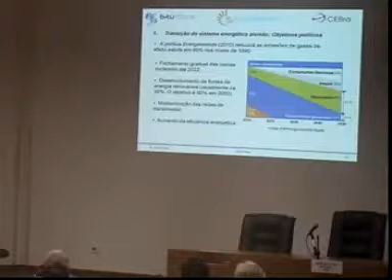In Germany, we have 30% of renewables as we are speaking right now, but we have 13% of nuclear power, and in total 40% of coal. That means that for years we have depended on fossil fuels and nuclear power for a cheap, reliable and secure system. Now, in order to become so dependent on renewables, we're going to have very big challenges with these intermittent sources. Nevertheless, the German government understands the importance of a sustainable growth of renewables with energy security, and that's why energy storage became a priority for the federal government of Germany.

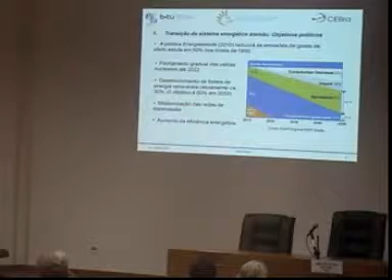Important is that in the Energiewende, the energy transition, by 2022 all the nuclear plants are going to be shut down. So this topic also becomes more relevant because there is a time approaching very close to us. And there are of course other parallel activities planned, for example to expand the network and to make more flexible and efficient the conventional power plants. So in Germany, we have a lot of challenges coming very, very fast.

This is an example of the energy mix before and after the energy transition. Here in this graph on the right, you see what I explained, that we are very dependent on fossil fuels, and how it's going to be in the future. Now, there is a law in Germany, and the renewables have priority. No matter what, the production of wind and solar has to be integrated in the grid, because there is no possibility to turn off the nuclear or the lignite power plants.

Then there is the need to reduce their load, if possible, or to generate an extra amount that goes to the network from Europe, the ENTSO, European Network of Transmission System Operators. It happened already in Germany last year that 100% of the energy consumed was supplied by renewables. But of course, it was a very specific case, a weekend with low demand, a lot of sun, and a lot of wind.

How did this happen? It's because in Germany there is already an overcapacity of solar and wind. This is already a reality. Therefore, there is a difference between Germany and Brazil.

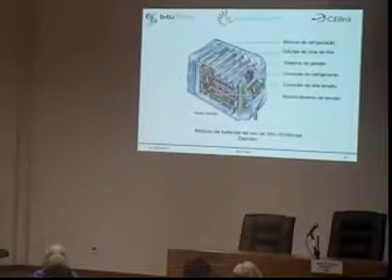In Germany, we do not manufacture the whole batteries. It is a trend in the whole world, but right now it doesn't make economic sense to produce the cells in Europe or in the United States because the prices are so cheap in Asia. So LG, Samsung, all these batteries from Korea, from China, they dominate the market. And in this case, we have an anecdote with a person that is also present here from Bolivia.

We got in contact a couple of years ago because Daimler in Germany was planning to sell two production lines for battery pouches, battery cells, the whole automated line, because they realized it's not economically feasible. They decided to import from Asia, even though they had already built the whole production lines. We met someone from Bolivia, from Comibol. We tried to establish a link to see if they wanted to buy the technology.

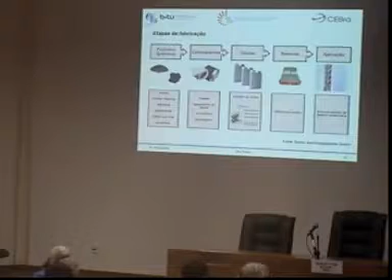Somehow it didn't work because of the time frames and bureaucracy, and because the software of the facilities was in German, many things. In the end, all these plants were sold as electronic waste, so that you have an idea that Daimler preferred to let everything be lost than to keep producing in Germany. So it is interesting to know that Germany also has the same trend as other countries. The pouches are imported, and then the arrangement is assembled in Germany.

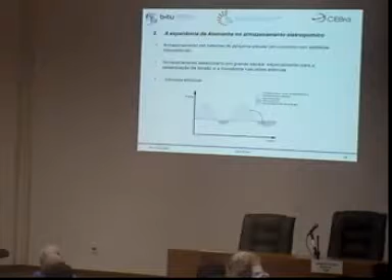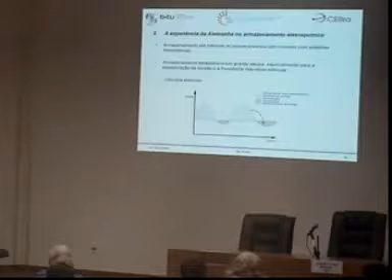And now to go really deep into the energy in Germany, I'm going to divide the presentation into three parts. The first one is storage at small scale. The second is stationary applications. And the third one is electric autos.

So in Germany, since 2000, there is a law called Erneuerbare-Energien-Gesetz, which in English is translated as the Renewable Energy Law, under which everybody is able to produce electricity and sell it to the grid with a contract with a warranty of 20 years. The good thing about this law is that it allowed what people call a democratization of energy. People were able to decide to put a rooftop system on their houses and know that they would get a good price for their electricity for years.

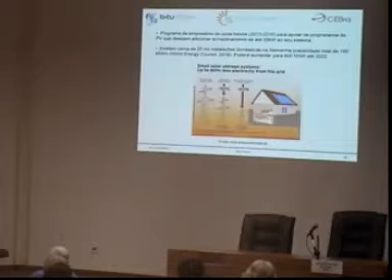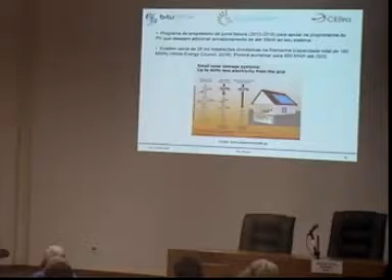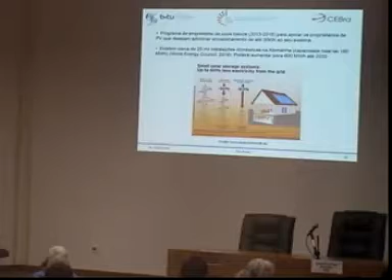We heard before in the presentations from the morning about the Tesla battery. In Germany, there are many other suppliers of these systems that also allow mini grids connected to the grid that become a virtual power plant, for example. So this development is particularly important, and it's expected to grow tenfold in the next few years because of these tax benefits. That, of course, has the benefit that we are going to need less extension of the grid, and also avoid congestion. So this has been a very effective measure from the federal government.

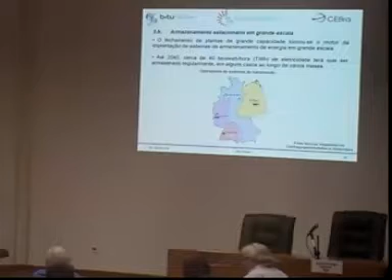Now I'm going to talk about the large-scale storage. In Germany, the whole German territory is distributed in 4 different transmission system operators. I live in Cottbus. It is in the east of Germany, and we have 50 Hertz. That's our company. And just for you to have an idea, if you want to install a battery system for primary reserve, that means the first one that goes as an ancillary service, then you have to write a proposal to the transmission system operator, and then they are going to evaluate if you have the conditions to provide the power needed with the response time necessary.

If you do, then you come to an leilão. ¿Cómo se llama leilão en inglés? A bid auction. Thank you. Then you go to an auction that is done every week, and then you have a price for your ancillary system.

So in this case, I want to show you this slide. This is the distribution of the most important battery storage projects in Germany. For example, in the east of Germany, close from where we are, we have one from the company Energiequelle in Feldheim that is 10 megawatts. We're going to talk a little bit more about it, but in general, in Germany, there are more and more large-scale applications, and as I said, they are part of the transmission system operators.

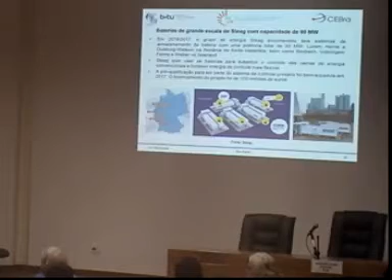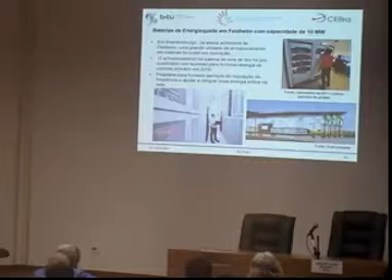This is the one in Feldheim that I said about before, 10 megawatts. And our university is a partner of that. We are doing some research of the aging cycle of the batteries. And this is using lithium ion. And here is a picture of how it looks inside. You have the different compartments with racks, and then inside the racks you have the pouches.

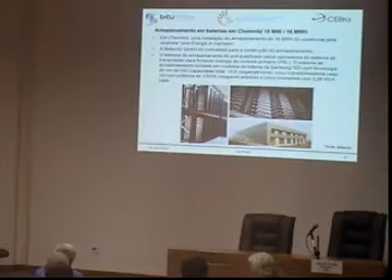Of course, in Germany there are very strict security measures, so all this inside the batteries is conditioned with the perfect temperature and humidity conditions. And the last one here is located in Chemnitz, and this one was one of the latest ones to be certified in the primary control reserve.

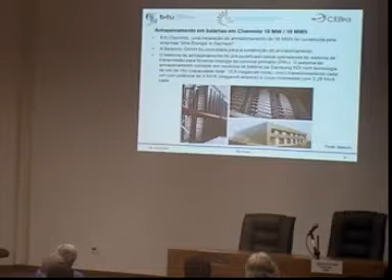So talking about other projects, before we heard about redox flow batteries. In Germany, they are planning to build the largest energy storage system, even larger than the one we heard before in South Australia, in Southeast Australia. There is one plant for 100 megawatts.

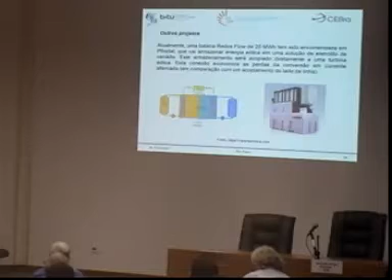In Germany, there are plans, it's still not started, to do the largest redox flow battery using salt caverns instead of tanks. So like the technology we were presented before, that you have the 2 tanks where the 2 chemicals are combined for the chemical reaction, then you're going to have salt caverns instead. This is theoretically going to supply a city like Berlin for 4 hours.

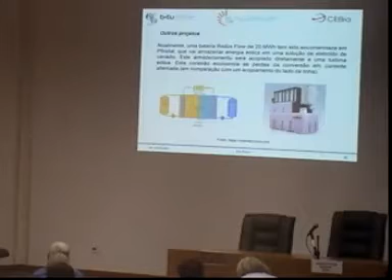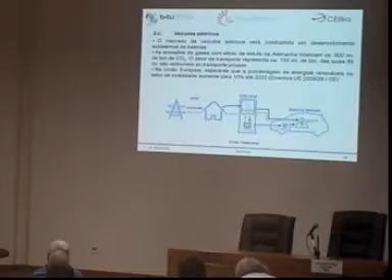And so the last topic of this presentation is the vehicles, electric autos. In Germany, somehow it hasn't grown so much. Germany is the 8th in the fleet of cars. I have here the annual growth of cars. Germany is actually after China, US, Japan, Norway, Netherlands, France, UK. Then comes Germany. Why? Because Germany has a very, very strong auto manufacturing. We have Volkswagen, BMW, Mercedes-Benz, and the whole industry has to adapt for the new requirements.

And in addition, Germany is the largest producer of biodiesel. So it comes from rapeseed, and in Portuguese is óleo de colza, vem da colza, da canola. So the biodiesel is a very strong industry in Germany, and also for large transportation autos. And now it's a point where the German government has to decide to which technology it is going to go. There is also research for hydrogen cars, which is a competing industry. So at the moment, the auto industry in terms of storage in Germany is the less developed.

And we can also note that with the infrastructure, in Japan there are already more charging points for electric cars than normal petrol stations. In Germany, that is not the case. In Europe in general, you have a lot of charging points, but for example, if you wanted to drive from Berlin to the UK through the ferry, you really have to plan very well that you are going to make it through the points. We already did this study, and you have to calculate very well. There is no wide infrastructure yet.